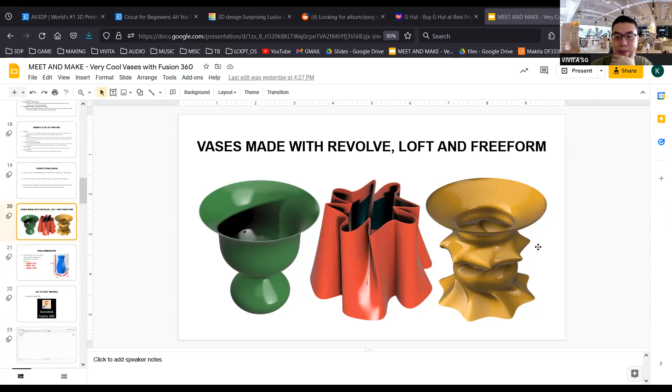So these are the 3 vases that we're making. I actually made this up quite quickly within a few minutes. Today we'll try to make a vase around this size. If we're going to 3D print, we shouldn't make it too big, otherwise it's going to take a long time to print.

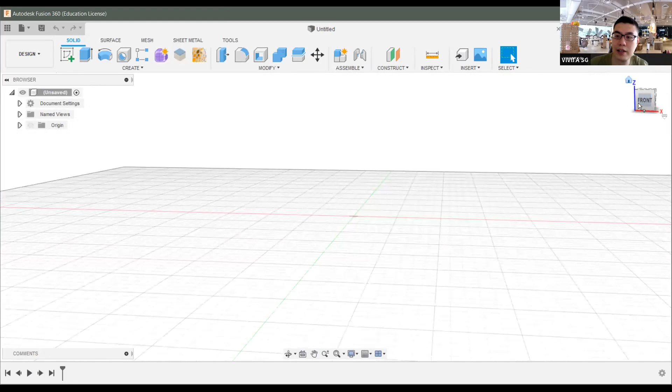The first thing to do when sketching is to always go to the front view. So I'll click on this front button over here. To go to the front view, just highlight this cube and press front. So you should be in this front view. Then the next thing I'll do is create a sketch.

On the top left, there's this sketch button, the one with a blue and green cross. When I click on create sketch, you see this yellow square appears - this is for me to know where I'm placing my sketch. Since I'm in the front view, I'll just click on the square, and I'll be sketching on the front view like this.

Once I'm in this view, I'm ready to start doing my sketch. If you guys are ready at this stage, let me know. If not, I'll give you some time, or if you want me to repeat the steps, I can do so. Remember, go to the front view - click on home, go to the front view.

Front view: click on this create sketch button, then click on the middle yellow square. Okay, then you should be in this view already.

Once you're done, I'll actually create a line. The important thing about using the revolve function is you have to make the shape on one side, either the right side or the left side. If you see there's a green line in the middle, that's the middle point of your sketch.

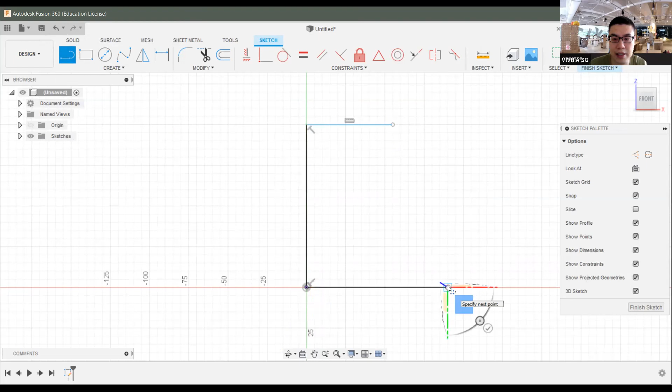So if you're done with that, the next thing I'm going to do is create the outer part of the sketch, which is using the curve.

What I'll do is select this thing called a fit point spline. When I click on this, I'm continuing my sketch, so I'll actually link the top part to the bottom part. The cool thing about this fit point spline is that I can create as many points as I want, depending on what shape I want to create.

I'll click on this point over here because I want to link the top part of the sketch to the bottom part. So I'll highlight this point and click here, then click any number of points that I want. I'm just randomly clicking, and then the last point, I'll link it to the bottom over here.

Once I'm done with that, I move my cursor and highlight this small green tick over here, and I click on it. So this means my sketch is already drawn.

As you can see, I've created a few different points here, so you don't actually need to follow this shape that I'm drawing. You can go ahead and create any number of points that you want. If you want to create only 3 points like this, it's also fine. If you want to undo, you can just click on this button over here to undo.

If I want to draw a simple sketch, I can just draw 3 points like that. I just click close.

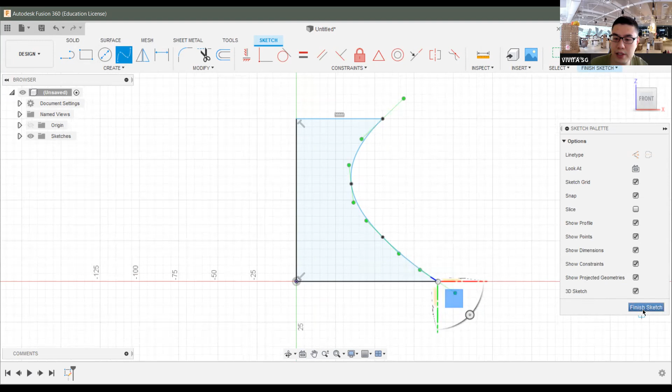Once I'm done with this, I'll click on this button on the right hand side here that says finish sketch. If you see there's this button here called finish sketch, once I click on it, my sketch is done.

Kenneth, yeah, I have a question. So what if I want to make the height of this vase like 100 mm, which is 10 cm?

Okay, 100 mm, right? Give me a minute now. There's this thing here called sketch dimension, let me find that. I think is it under inspect? No, wait, I don't know. No, okay this one I'm not really sure, I need to go and find out more.

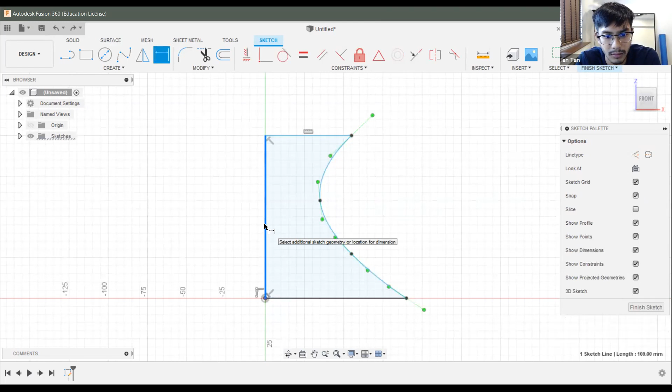When you draw the line, you can select L to draw the line, and then when you just draw one line, there'll be numbers that come out, so then you can just type in your number. So if you want to change the height, I think you can do that, as in you just measure when you draw the line. Or if I'm not wrong, when you select the line, you can change the dimensions, you can type in the dimensions. I think the shortcut is D, so you click on the line, then press D. D for dimension, I'm not really sure if it works.

Yeah, as in the dimension comes up. Yeah, correct, this 55. Then you can change it at any time, like to 60 or 70. That's the nice thing about Fusion.

Okay, so what we'll do now is actually play around with the outer shape of this. So once you draw a curve, you can actually do this.

Once I'm done with this, the next thing I'll do is click finish sketch, then go to create, and select the revolve function. Then I'll select profile, and select the axis. And my vase is more or less 90% done.

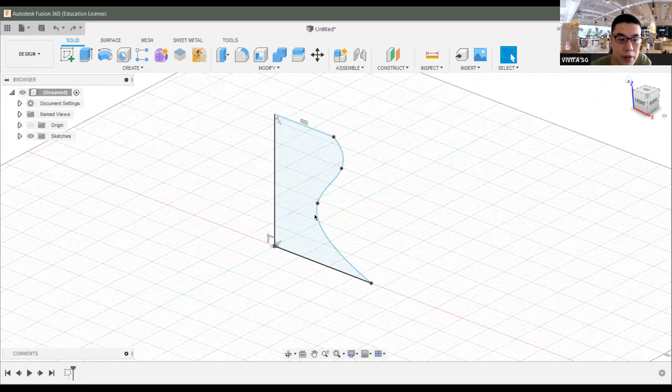The cool thing about Fusion is you're able to edit your sketch even after you're done. So we can right click on this and edit sketch, then click finish sketch, and the shape updates accordingly. You can just always right click on it and edit, so every time you do this you have a different design.

Click finish sketch, done. If you guys need to know how to do the revolve function, I can show you guys again. Once you already have this sketch, you click on finish sketch, then go to this function here called create. Go to create, create revolve.

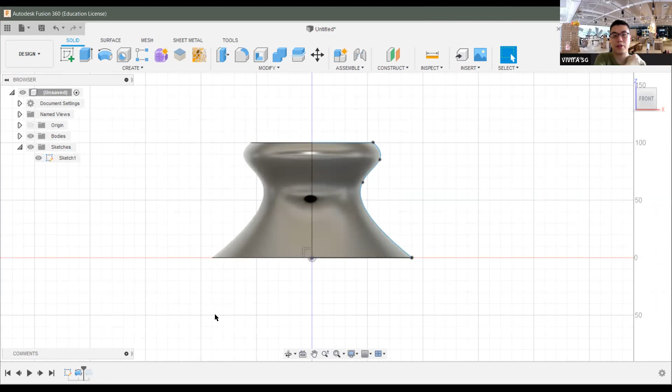And click OK. If you guys have any questions, just raise your hand or unmute yourself and ask.

And then the cool thing is that you can actually edit the sketch like that, and then you update in real time.

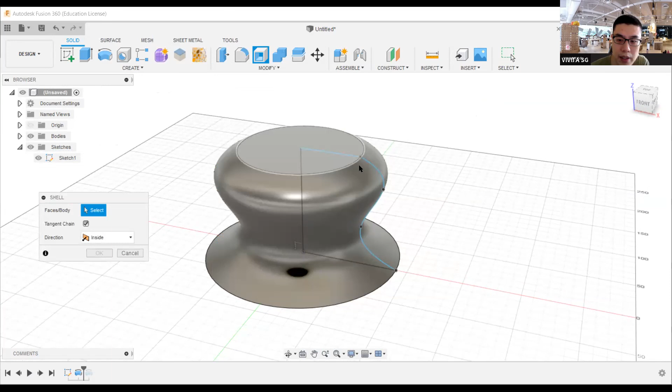Okay, so what I'll do now is, once I'm happy with this shape that I have for my vase, the next thing I'll probably do is add a shell to it so that it becomes hollow. So I'll click on modify and select the shell function, and give it a 0.5 mm thickness. So this is how my vase looks like, and my simple vase is complete.

All this is actually done within less than 15 minutes. And the cool thing is you can keep editing your sketch again and get another design, another vase. Or if you want, you can make it like this, click finish sketch, and you have another vase.

And if you want the vase to be thicker, you can always right click on this, click edit feature, and maybe give it a 1 mm thickness or a 4 mm thickness if you want. Kenneth, is there a recommended thickness? 0.5 is the best, if you're going to 3D print.

Of course, if you make it thicker, then it becomes sturdier, but then it means your printing time will be longer because you have to print the thickness. So this is how we actually use Sketch and Revolve to create our simple vase.

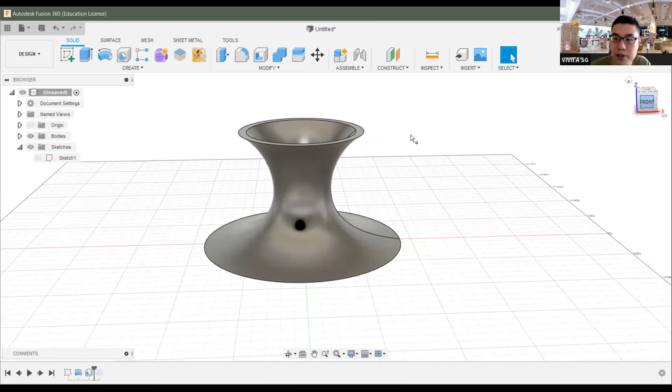The important rule to remember when creating a vase using this function is to make sure the top and the bottom of the vase is perfectly parallel to the plane, meaning they need to be perfectly straight. If not, the revolve function won't work very well. So these three lines need to be perfectly straight. And for the side profile, you can create any number of curves if you want.

So if you guys are done, maybe you can move on to the next function, or if not, you guys can play around with this function again. So maybe what I'll do is create a more complex shape.

Sketch again. And then maybe make something that's more interesting, so I'll have more lines. And then I go to Revolve. So now I have a very weird looking shape like this.

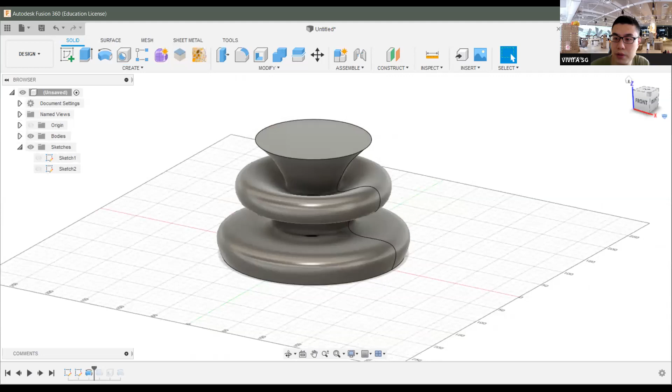And then as usual, the coolest thing you can do is edit the sketch and just play around with the shape.

But Kenneth, for 3D printing, if there's a lot of overhanging, it's quite hard to print, right? So when creating this profile, do you have any recommendations? Try not to have overextended like that. But if you're printing in vase mode, usually overhang is fine, because there's a minimal thickness.

So if it kind of goes like very, very wavy? Yeah, it's fine, it's fine, because you're printing with a thickness.

So usually when you're printing vases, you actually print at a slower speed. You don't usually print at 100%. When I print vases, I print at 70-80% speed. So when I physically tune on the printer, I put the speed to 80%.

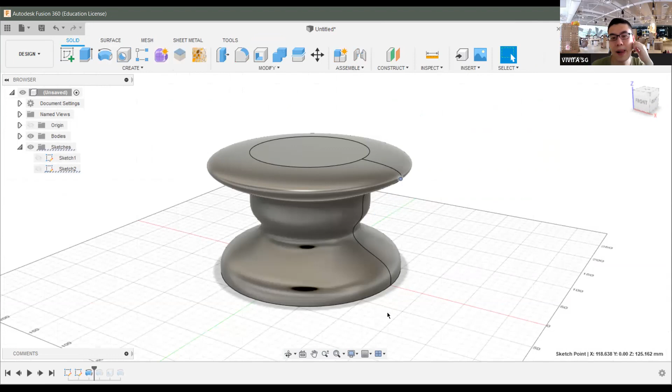So that it won't have any errors. If you want to make the thing like that, it's also fine, but it basically still has to go sideways, right? Yeah, it cannot go up and down. Correct. Nico and Ayana, have you tried 3D printing before?

Yeah, you should try. Then maybe you can share with them a bit about how 3D printing works and what are the constraints when it comes to 3D printing. Okay, the constraints of 3D printing are actually quite a lot. It really depends on what you're trying to make and what you're trying to print.

Usually when we print, we try to print without support, because support actually increases your print time and wastes material. So to minimize that kind of problem, what we do is try to either create something that has minimal overhangs, or we print them as separate parts and join them together, so that we minimize the chances of the print failing, especially when you're printing something very big.

Like for this instance, if I want to print this vase, what I'll do is try to print at a slower speed.

The cool thing about Fusion 360 is there's this thing called section analysis. When I click on it, I can actually simulate how the thing will look like when it's printed, like that.

So this actually will let me know whether or not my model is fully hollow. It's not showing the section analysis. I think maybe it's lagging. You stop dragging it, let it settle. Okay, wait, let me try. Can you see now? I think maybe you drag and stop. Okay, now I can see. When you stop, then you can see, like that.

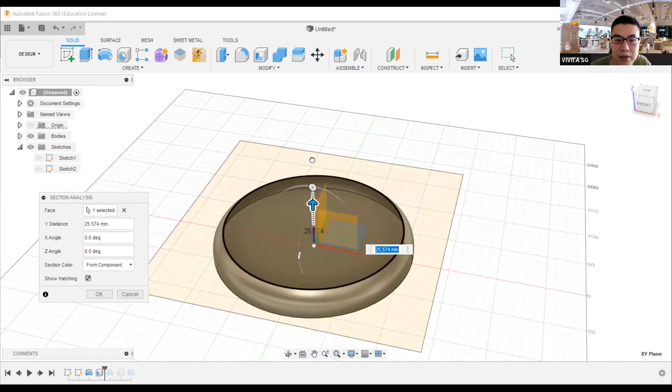Nico and Yana, do you know what overhang is? It's a bit hard to explain without a physical example.

Yeah, can you all see this? And then this is basically a very simple kind of bucket thing. I was trying to create something that can fit together.

But anyway, so the thing is, how 3D printing works is it will build up. It will print the first layer, then the second layer, then the third layer, then the fourth layer, etc. Then it will slowly go up.

Let's say at the third layer, you suddenly have something that's hanging over here. Then your design comes out like here. This is called overhanging, meaning there's nothing below this thing to support it. Then it will kind of fall to the ground, to the bed, so it cannot print properly.

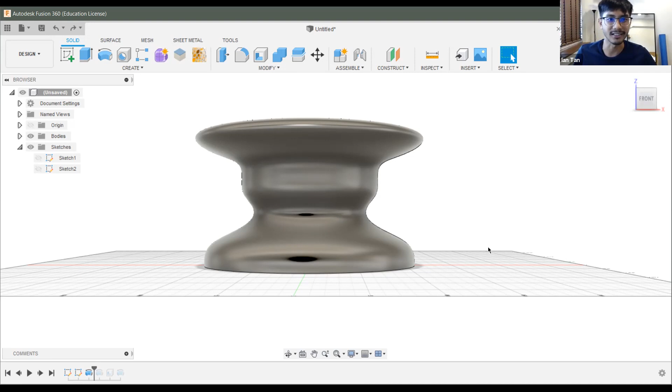This is not even what you all learn in school. We don't use Fusion though. Can you all see? Oh yeah, can.

Maybe I'll change it because it looks a bit fat and big right now, but yeah, I did something like this. Maybe I'll change it later. Then my profile is like this.

It would be cool if we can actually get a ceramic 3D printer in the space, and then we can print all these.

Okay, so mine is a very simple flower vase. So how it looks like is because I use dark mode, so I just want to show from here.

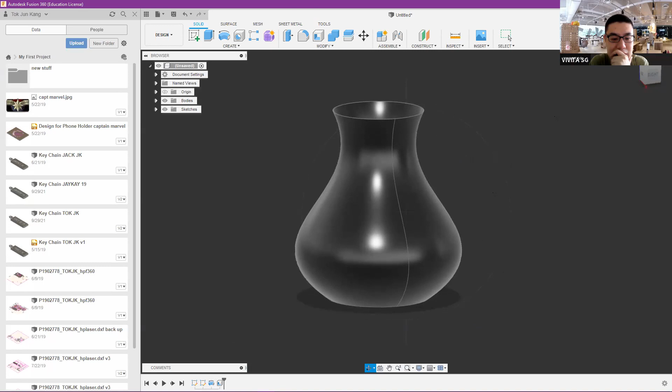Well, you guys got the education license. Yeah, SP provides it, very good. Why can't I press? Oh, need to press edit. No, right click, you right click and edit sketch. But it doesn't allow me to do it.

Steady, you guys can conduct the next workshop, we can multiply ourselves. Yeah, so here's how it draws, just like that.

So there's this, the three lines, right? So it's like the first point, second point, third point, then after that there's a spline. Yeah, it's just like that, really just like that one. Basically just like that.

The cool thing is if we can use the emboss function later to give it a nice surface, it can actually be very cool. But the emboss, that one we will try later.

Okay, Ayana, Raniku, do you want to show or are you guys still working on it? Do you all have your models? No? Okay, do you wait. So far, do you all have any questions? If you want me to repeat the whole process again, it's fine, okay, I always start from scratch and do again. We have a lot of time.

Or you guys need time to figure it out on your own. If you have questions, you can either unmute the phone or laptop you're using, or type it in the chat. Okay, there's a chat function also. Don't be shy, okay, there's only the two of you and all of us are BB Stop staff. You can ask us anything, or if you have any questions as to how you want to make a different shape, you can just ask us, okay?

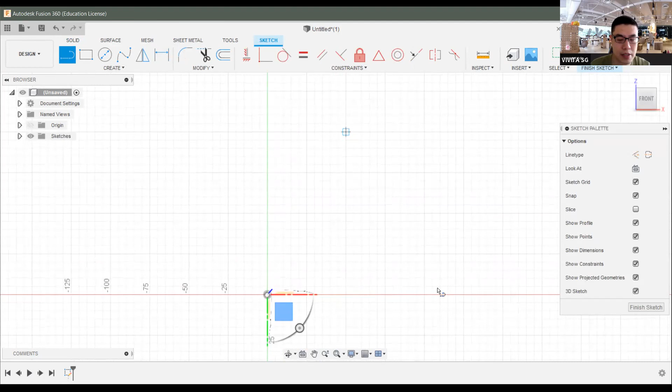Okay, don't worry, I will repeat the steps again from scratch. First thing we do, go to the front view again. Okay, click on create sketch, click on the yellow square, draw 3 straight lines. 1, 2, 3. Okay, and then press the escape button, and then click on the fit point spline so that we can actually draw nice curves.

And then click on finish sketch, then go to create, select the revolve function, select the profile, select the axis, and voila, done. Okay, or you can also...

Revolve it around a different axis if you want, and it becomes like that. Okay, and then create, revolve, click on the center line, and then okay.

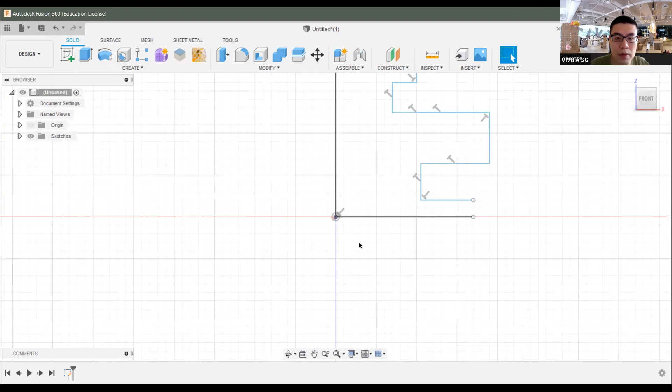Okay, maybe let me try to sketch the side profile with straight lines and see how it looks like. This, yeah, also can, just looks very blocky.

And let's put a shell. Is she not trying to log in from a different device or something? Like, as in, I'm just thinking if she's using a phone, then the screen is quite small, I don't know whether she can see. Yeah, if she's using a phone, then it'll be a bit small to see. Oh yeah, I just realized she's watching this on the phone, I don't know whether it's a phone or tablet or something. Ayana, are you still there? Maybe you want to let us know whether you're changing devices or something?

Yeah, I'm trying to change it on my laptop. Okay, no worries, we'll wait for you, no rush, no rush. Or Divita can use it on Araniko's laptop since he is distracted. Yeah, no rush. Vivita Orchard doesn't have deadlines. Deadlines don't apply to kids, only applies to us.

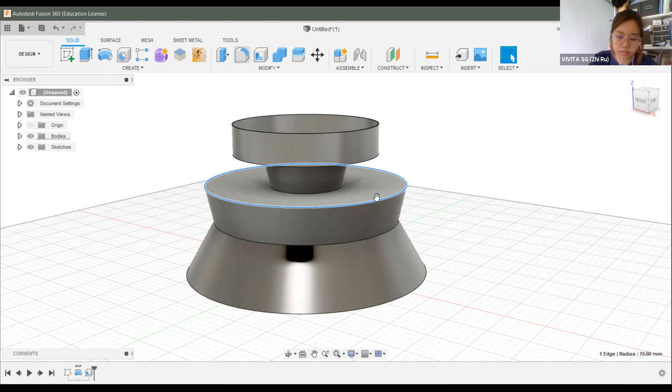Oh no, let me sketch a nice one.

Yeah, but for this I really have to sign in through my school account, I cannot use other accounts. Oh, I think it's the same for probably all Autodesk softwares. Okay lah, we got the free license from Autodesk in the space, but we only have a few, right? I asked for four licenses for Fusion 360, and then I got other software also like AutoCAD, Inventor, all those things. Yeah, I think in the space, I'm not sure why sometimes Fusion gets signed up, it's because the kids use the same account. Yeah, a bit strange, that's the only problem with Autodesk accounts for Fusion 360. Other than that, the other softwares don't actually need the login as well, and it's because of the cloud thing. And Ayana, you managed to connect?

Yeah, okay great, great. Okay, another cool thing I want to show you guys, once you actually revolve it, and then once you shell it, when you're shelling, remember to only select the top face, okay?

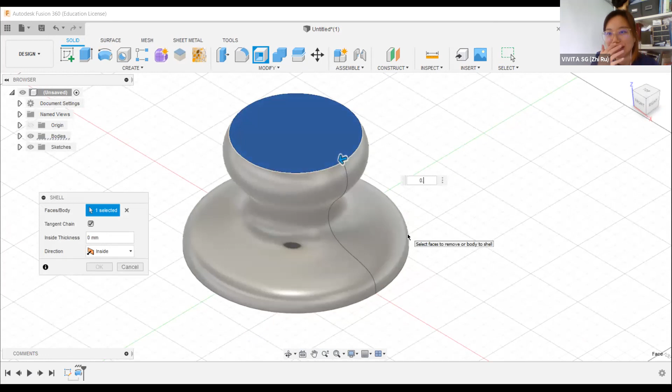Wait, sorry, I think maybe you can show Ayana again, the drawing of the lines and the revolving, because I think she may have missed that part just now.

Okay Ayana, let's start from scratch, let's go all the way back. Remember, click on the front view, click on the create sketch button over here, click on the yellow square, and then select the line over here. When you select the line, you see your cursor becomes this light blue square, and then just draw 3 straight lines. I'm just going to draw roughly 3 straight lines and make sure the middle line is actually along the green line that you see over here.

Like this, and then once I'm done, I press the escape button. I'll just start with these 3 straight lines first, then once I'm done with this, I'll start to create the nice curved profile on the side. Ayana, if you've gotten to this stage, just let me know, or I can repeat the steps again: click on line, draw one line on the top, the middle line, and the bottom line, and then press the escape button once I've done my 3 lines.

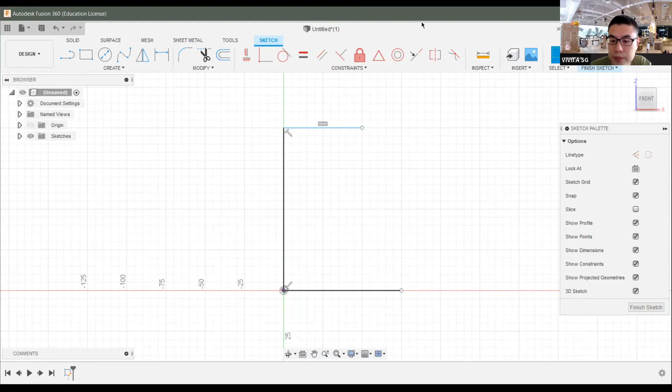Ayana, are you there? Have you got it? Any questions, just unmute yourself or type in the chat. If you're okay, just give a thumbs up, then I can show you the next step. Ayana, are you there? Ayana, it's fine, you can remain unmuted. Yeah.

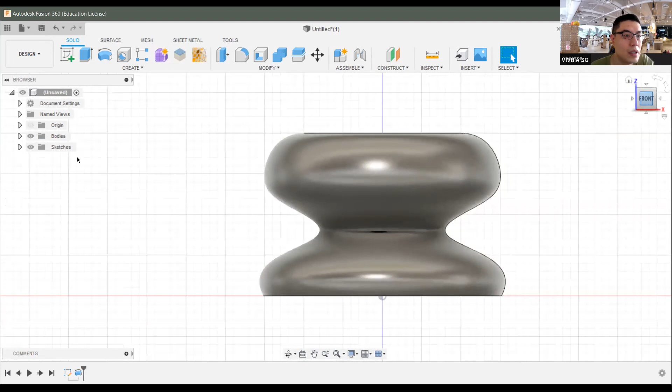When I'm doing the first 3 lines, do they have to be the same height? No, they don't need to be. We see the sketch I drew, right? The top line is actually shorter than the bottom line, but it's really up to you. You can have all lines the same, or the top line longer than the bottom line. This is fine as well.

You don't have to worry about whether the top or bottom lines are long or short, because once we sketch the other side profile, you can actually change the lengths of the top and the bottom. That's the good thing about Fusion 360 - nothing you draw is actually final until you decide it to be final. You can always keep changing your sketch and design whenever you feel like it.

Suppose I already started drawing this sketch like this. I can actually make the top shorter - if you can see on my screen, I'm making the top shorter. Initially I drew it as a long line, but now I decided to change it. I can make it shorter, and also make the bottom one longer if I want to. It really doesn't matter if it's long or short. If you want to make both the same length, that's also fine. So don't be too worried about the lengths, because you can always change them if you feel like it.

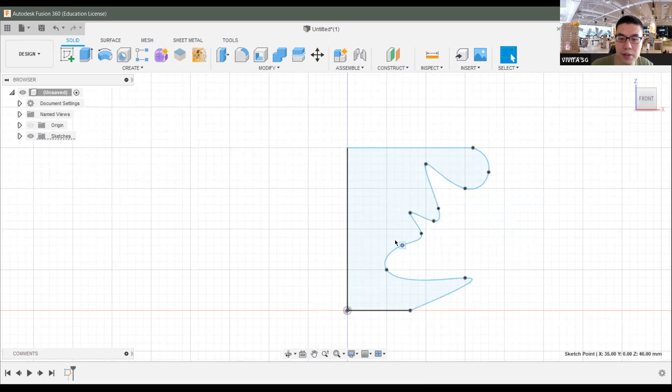The cool thing is you can actually move these points around to form the shape that you want, so you can have weird shapes like this. And then you revolve it to get something unique like that. Because the more points you have, the more control you can have over it.

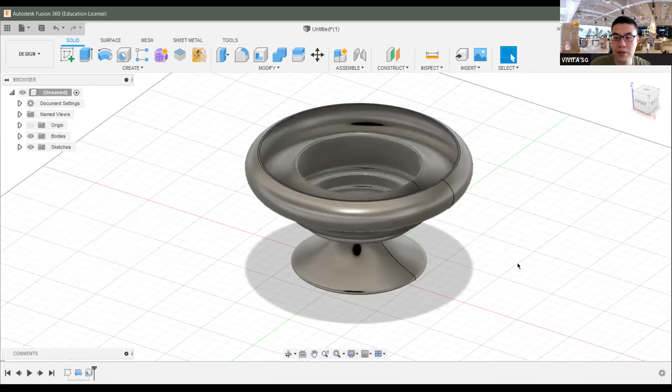And then you see this dialog box that appears. You just need to give it a number. For 3D printing, what we usually do is give it a thickness of 0.5mm, so just type 0.5 and tap enter. Now you can see your vase is more or less done - it's hollow all the way through.

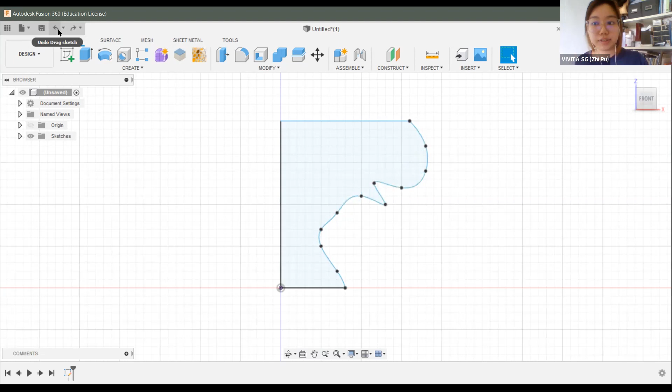Can you repeat that? I couldn't really hear anything. Okay, what were you saying? Which part would you like Kenneth to repeat? No, can you just repeat what you said because I couldn't really hear anything. Which part are you at? Are you able to get a curve? Yeah. Okay, maybe you're at the revolve, the part where you need to do the revolve, right? So you have drawn the 3 lines and you've already drawn the curve already, right?

Yeah. Okay, so the next thing that we need to do is to revolve it. So revolve is actually located here. If you see this create button on the top left, you click on it and then select this function called revolve. Or if you have the same UI as me, you can click on this button over here called revolve. So when you click on it,

you will see that the revolve dialog actually appears. So when this appears, what you need to do is to select the profile. So when I click on select profile, I'll highlight my mouse and select this entire blue thing that you're seeing. So I've selected my profile already.

Okay, if you're able to get to this step, just let me know. I'll repeat again. Click on revolve, click on profile, and then select this profile. How do you know if your profile is selected? You can see that it's actually showing here - one selected.

Okay, so once you have selected this, the next thing you need to do is to select the axis. The axis is actually the middle line. So when I click on axis, I'm selecting the middle line over here. If you can see, when I zoom in and move my mouse over, it's actually highlighting it. So when I highlight it, my vase is revolved around the center axis.

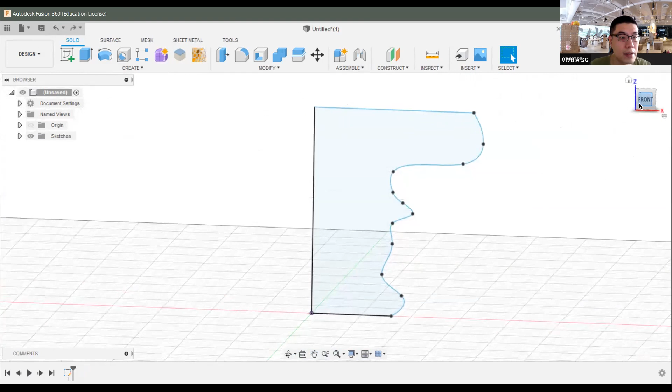Let me just show you guys the steps again. Click on revolve. Click on profile over here. Select the profile, so when you move the mouse over, this entire thing is selected. Then select the axis, and select the middle line over here. And then click on OK, and you're done.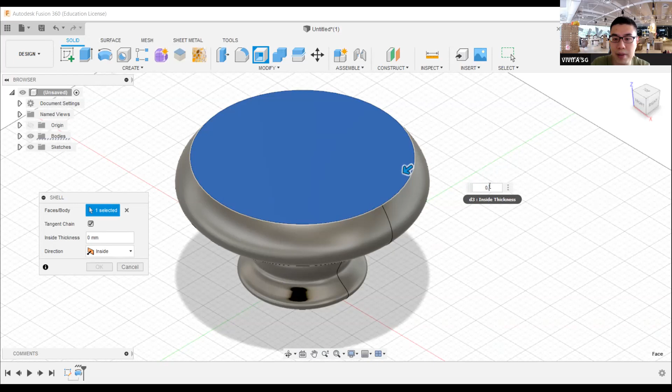And when it turns blue, you see there's this small text box that appears. That's actually for me to decide my thickness. So as I mentioned before, the best thickness size to use is actually 0.5 mm. So let's type 0.5 and press enter.

You can always change it if you're not happy with it. So if I want it to be thicker, I can give it 3 mm. Or if I want it to be even thicker, I can give it 7 mm, or 70 as well. Oh sorry, maybe - so as you can see, my vase now is quite big.

Okay, so once I'm done with this, my vase is more or less done already. If you're able to get to this step, just let us know.

Let me repeat again. Click on the home button and go to the perspective view so you can select the top part of the vase. Click on the shell function, then click the top face. Highlight and select the top face, enter 0.5mm in the dialog box, and press enter. Now you have your vase, and it's perfectly hollow.

The next step is to export this so we can print it. That part is quite straightforward, I can show you guys how to do it. If you look at the left-hand side, there's this thing called bodies. Click on this button and select the body. When you select the body, the whole thing is selected. Then right-click on it, there's a function called Save as Mesh. So when you click Save as Mesh, you can save it as an STL file.

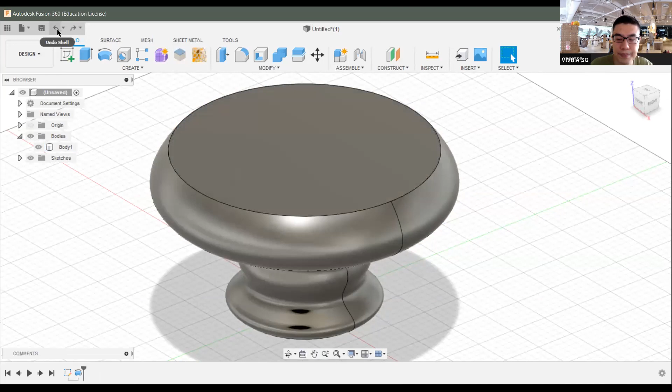Okay Ayana, do you need me to repeat any of the steps? Or are you lost, are you stuck anywhere?

I can't find the revolving button. Okay, you can't find the revolve function. Let me share screen. The revolve function is located on the create bar. Do you have a create bar over here? Click on it and look for the function called revolve. Do you see it there? There isn't any on there. How can that be?

Are you on solid? Or are you on the surface tab or mesh? Make sure you're on the solid tab. Can you see where my mouse is? Do you see that I'm on the solid tab, or are you on the surface or mesh? Maybe you're on a different tab, that's why you can't find it. Yeah, I changed it to the solid one. Okay, then do you have this create button over here? Yeah. Then click on it, and you should be able to see the revolve function there.

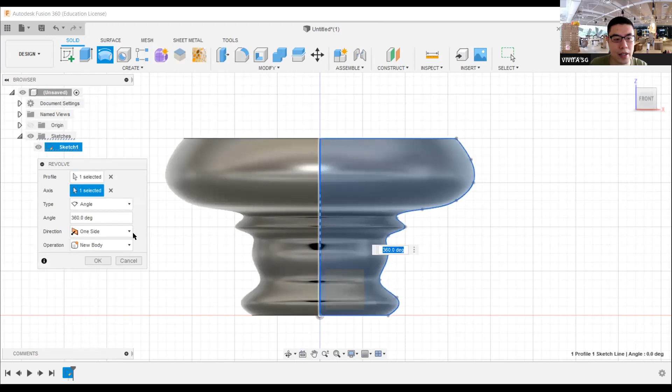Okay, so how do you revolve it? You select the sketch again. Go to sketch. On create, revolve, select the profile. Make sure it shows one selected. Click on the axis, which is the middle line of the vase. And then you should have this. Just click OK.

Once you manage to get this, the last step is to shell it. Shell is still on the solid tab. Look for this thing called modify, then select this button called shell, select the top face of the vase, give it a thickness of 0.5, and press enter. You should be able to get something like that.

Hey Ayana, everything okay? Do I hollow it after I revolve it? Yes, revolve it first and then hollow it, because if you're not revolving it, there's nothing to hollow out.

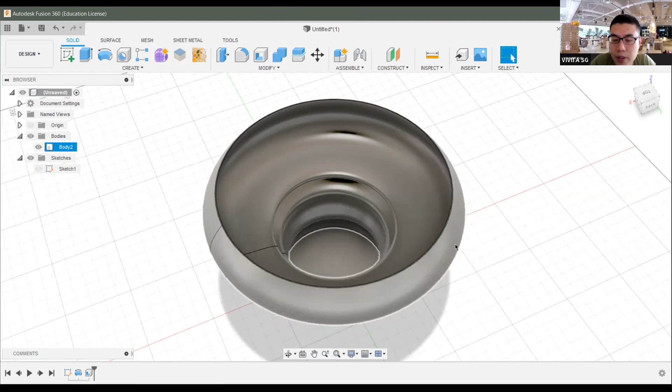Ayana, have you done the revolve step? Yeah. Great, great, okay, last step is just to shell it. What do I do once I've shelled it? Once you shell it, you're done already. You're done, man. Good job, your vase is done.

You can save it for print. Ayana, are you able to show us your vase? If you can share screen. Yeah, do you want to share screen?

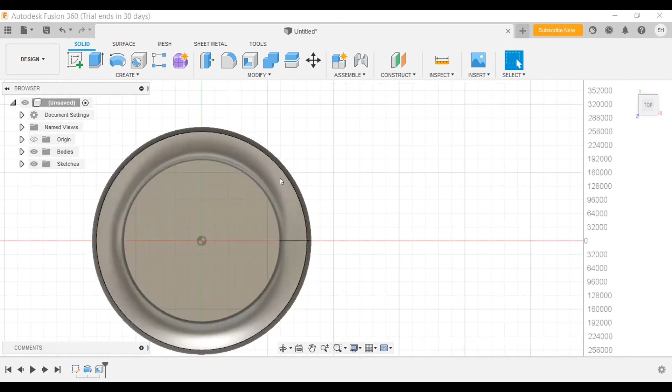Nice. Ayana, maybe you can change the view. Click on the home button on the top right, do you see a small home icon there? Oh, that's nice, wow, good job Ayana, very nice. You see the cube at the top left corner, there's a home, go back to the cube on the right, on your top right. The view, the one that says slightly lower, no too low already, the one that says front. You see the ZX front, you see the home button, the small home icon? Click on that one. Nice, looks very good.

Okay, remember to save your work, Ayana. Let me show you guys how to save.

Okay, I don't actually recommend saving. What I do is usually I export, because saving actually saves it to the cloud account, which takes a long time to load sometimes. So if you look at the screen, there's this button called save. Usually I don't use the save function. I use this function here called export.

When I click on export, I can save this Fusion 360 file as an F3D file to my local drive. So whenever I want to access this file, I don't have to log in to the cloud every time and wait for it to download. It's actually faster that way.

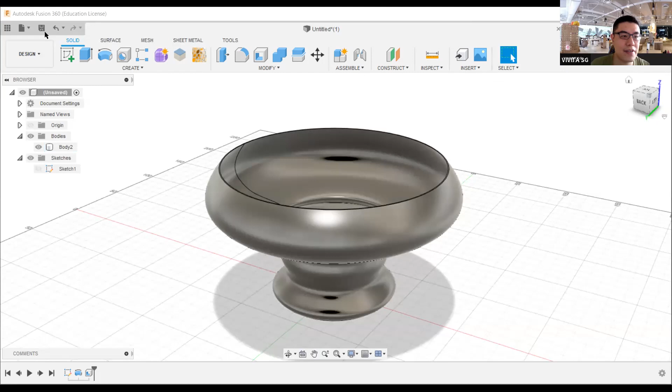So what I'll do is type a name, call it test vase, and then click on export. Right now my file is saved on my desktop already, over here, test vase. Now if I click on save, I can show you guys what happens. It actually uploads to the cloud, which sometimes takes a long time to load, and sometimes the cloud servers are on maintenance.

I can't actually access my file if they're doing maintenance. So I usually try not to save to the cloud if I don't need to.

These are some of the files which I saved to the cloud last time. If I want to access my file again, I can click on it and double click to look for it. So if I export my file as an F3D file, when I come back to Fusion 360, I can always open up the file from my computer, open it from my drive, and open it up again.

That way I don't have to always wait for it to download from the cloud. Ayana, if you want to save it to the cloud, it's also fine. The files won't get deleted, don't worry. It's just that sometimes when they're doing maintenance, you can't actually access your file if you want to work on it. So exporting is more of a safer bet for me, because I've experienced that before - when I save to the cloud it happens to be on maintenance and I can't work on it for about 2 or 3 days, which delays everything.

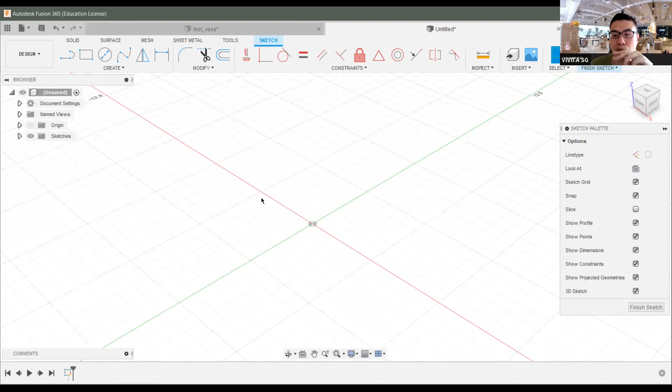Okay, so for this loft vase that I'm doing, I'll create a very simple one. I will have the base of my vase as a circular shape and the top part of my vase as a square shape. So what I'll need to do is sketch two shapes. Right now I'll just create a circle.

Okay, so when I'm done with this, I click on Finish Sketch. So I've created the bottom part of my vase. Let's try to create that first. Okay, so this is actually the bottom of my vase.

The next thing I need to do is create another sketch for the top part of my vase. In order for loft to actually work, you need to draw two different shapes. You can't draw similar shapes for the bottom and top of the vase, otherwise that will just be a very straight vase.

So what I'll do now is create another shape for the top part of my vase. To do that, I need to create something called an offset plane, meaning I'll be sketching another shape directly above this sketch I've just drawn. I'll need to use this function called offset plane.

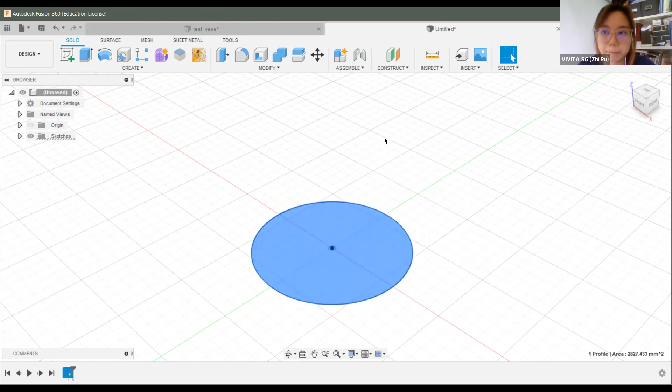Not yet, not yet. Okay, are you able to find where the circle is? Make sure you are in solid as well. Make sure you're in sketch, okay?

Okay, click on create sketch and then select this square over here, the one on the extreme right. Click on it and you should be drawing on this plane already. Yeah, so this plane has a green and red line. Are you on that plane?

No. Okay, you go to create sketch. Okay, do you see a lot of grids there? When you click on create sketch, Ayana, do you see these 3 yellow squares that appear? You see the one with the green and red line, the flat one. The current one on screen is blue and red. The one we want to choose is green and red, which is the one on the right over here.

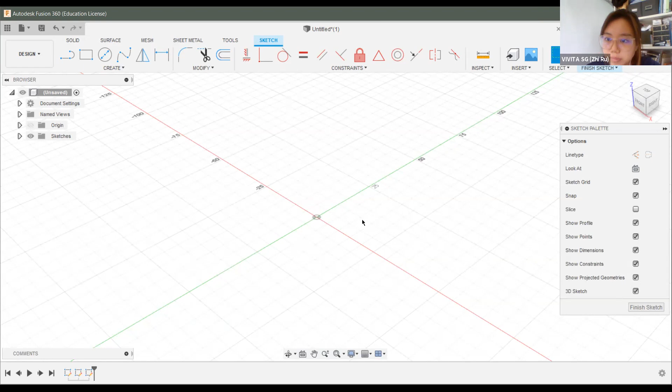Can you find create sketch? Okay, so are you able to select the bottom plane? I think I clicked on the wrong one. Oh okay, if you click on the wrong one, just click on undo — there's this undo create sketch over here, just click on it again. Okay, so just go to create sketch. Select bottom. Okay.

Ayana, are you able to get to this stage?

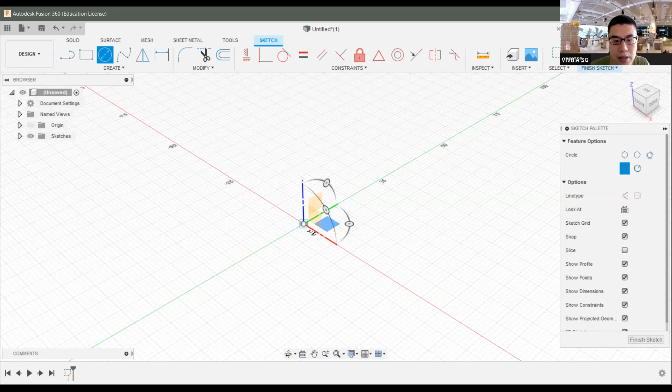Okay, so the next thing we'll do is create a circle. Just click on this create button and highlight the circle. You see there are quite a few options when you move your cursor on the circle, but we'll actually create a center diameter circle. Can you see that I'm selecting this center diameter circle? Okay, click on it, and make sure you move your cursor to the exact center dot of this entire thing. Once I move my cursor there, I'll click once and drag it out. So you have to decide how big you want this bottom base to be.

If I want it to be 40mm, like about 4cm, I just enter 40. If I want it to be 80, I'll type 80. If I want it to be 60, I'll type 60. But for me, I want it to be 40, so I type 40 and press enter. Then my circle is drawn already. Don't worry about the size, you can always change it later once we move ahead. As I mentioned before, in Fusion 360 you can always edit all the dimensions if you're not happy with it, even though you've made a lot of progress with your model.

So once I've done this sketch, the bottom part of my vase is done already. Ayana, have you drawn your circle already?

Yes, okay. The next thing we need to do is click on this button here called Finish Sketch. So just click Finish Sketch, and then your circle is more or less ready.

The next thing we need to do is draw the top part of the vase. Like I mentioned before, the top part of the vase shouldn't be the same shape. If not, your vase is just going to be vertically straight, which is quite boring. So what I'm going to do is sketch another shape, which is the top of my vase. In order to do that, I need to create something called an offset plane. That means I'm taking another piece of paper, drawing it, and putting it on top of this circle.

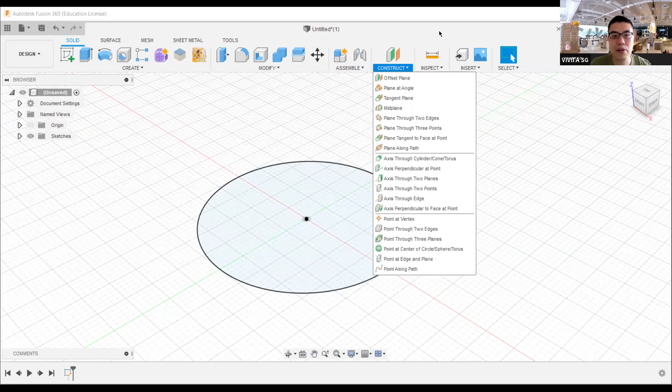So how I'll do that is create an offset plane. If you look at this construct button, when I click on it, there's this thing called an offset plane button. Before I select that, I need to highlight my circle. So I move my mouse over this circle and select it. When I click on it, it should turn dark blue, like this. Then I go to construct and select offset plane. When I click on select offset plane, you see this yellow grid appears, and there's an arrow showing how high it's supposed to be.

If you're able to get to this step, just let me know and I'll show you the next step. I'll repeat again: before you select the offset plane, click on your circle, go to construct, select offset plane, and you should get this yellow grid appear. Ayana, let me know if you're able to get this.

I've got it. Yeah, she got it. She got it, right?

Okay, then the next thing we need to do is decide how high you want your vase to be. That 0.00 mm is for me to decide how tall I want my vase to be. So if I want it to be 80cm, I just type 80cm. If I want it to be 8, I just type 8. The values don't mean anything, you can always change it later.

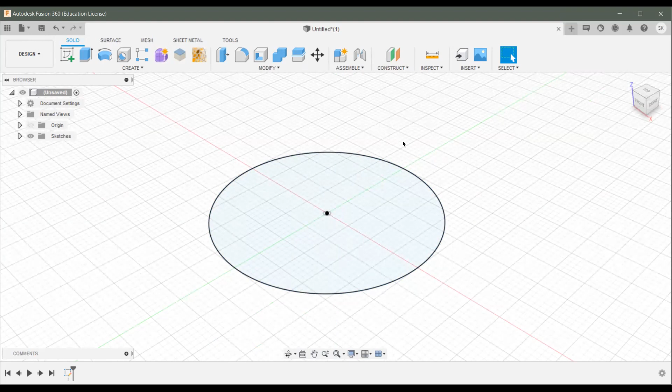So like for mine, I want it to be 6 cm, so I just type 60 and I press enter. Okay, so my vase will be about 6 cm.

So once you have done this, the next step is to actually create a sketch on the higher plane. Okay Ayana, are you done with this? You can always change the height later.

Don't worry about being so precise. Okay, so the next thing we need to do is to actually draw a sketch onto this higher plane. So what we need to do is move your mouse and select this plane on top over here. When you select, click and highlight and select it, it will actually turn dark blue like this.

So when I click on this plane over here, then the next thing I'll do is I need to create sketch. When I click on create sketch right now, I'll go to the top view like this, and I will draw another shape which is not a circle. So what I'll try to do now is actually try to draw a square.

So I actually use a 2-point rectangle to draw a square on the top of it. I'll place it at the center of the grid over here, and I'll draw... click the wrong function. Okay, I'll actually draw a center rectangle. So I'll click on create.

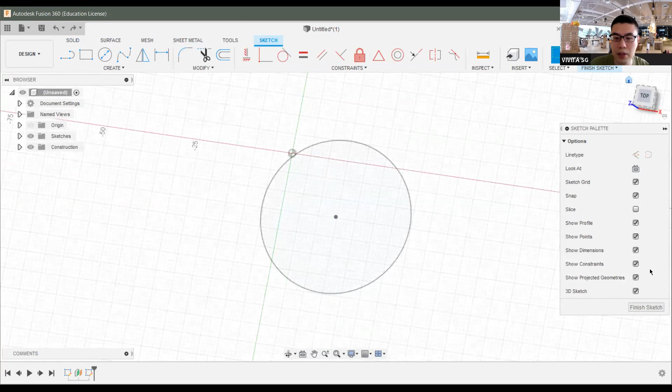Like this. Okay, remember, if you want to draw on the top plane, make sure you select the offset plane. Make sure you select the offset plane that we drew just now. Make sure you click on it and then create sketch.

If you don't click on it and if you click on create sketch, you're actually drawing it on the bottom where the circle is. So when you click on this offset plane, it means you're telling Fusion that you're drawing on this plane and not on the bottom plane. So create sketch and then go to the top view.

Okay, and then what I'll do is I'll create a rectangle, which is a center point rectangle at the exact center. And I'm not actually drawing a rectangle, I'm drawing a square, so it has to be exact on both sides, so it's going to be 20 by 20. And I type enter and I click finish sketch. So as you can see, top part of my sketch, top part of my vase, is a square, and the bottom part is a circle.

Before I create the sketch, do I have to click offset plane? Yes. Okay, if you have your offset plane, right, you should be able to see this yellow thing, right?

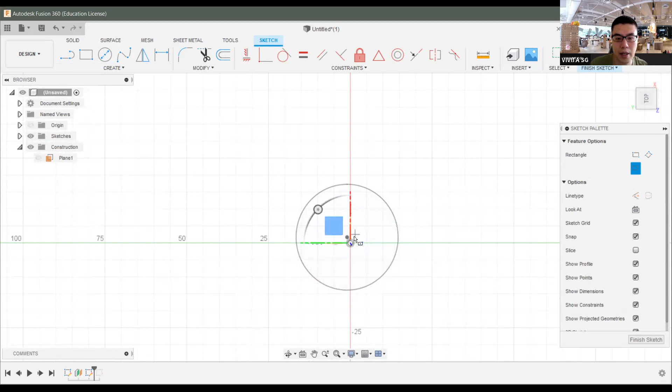And once I'm done with that, I'll go to the top view over here, click on the top button, go to create over here, select rectangle, and click on center rectangle. Move my cursor to the exact center point over here, and draw a 20 by 20 square. Good. Click finish sketch. And then once I'm done, I click on the home button over here, go back to the home view.

Okay, we are about 80% done with this already.

Once we have two sketch objects, one at the top and one at the bottom, the next thing we'll do is create a loft. To do that, go to create and look for the loft function. Remember you have to be on the solid tab. You'll see the revolve function, but move down two functions and you'll see loft. When you click on loft, the loft window should appear.

Then what we'll do is highlight the top and highlight the bottom. Select the top and click once, select the bottom and click once, then click OK. Now you have a very simple shape like that.

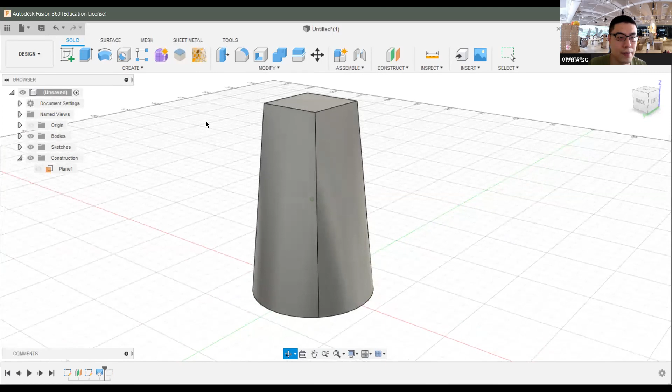You see the top is actually square, the bottom is actually circle. Let me just undo again. If you're able to get to this step, just let me know. So if you've drawn your sketch on the top and the bottom, you should be able to start your loft already.

Okay, Ayana? So once you have done this, go to create, select the loft function. Then once you see this window appear, just click once on the top and click once on the bottom, and you will see that your vase is already done.

If you're able to get to this stage right now, here's where the fun comes in. You see these four white dots over here, and there's actually four white dots at the bottom too - four white dots on the square and four white dots on the bottom. The cool thing about loft is that you can actually make this into a twisted looking vase.

How we'll do that is to select the point and just move it around. As you can see, if I move the control point, the shape of my vase actually changes. You can move this like that, and you can move it like this. You can create a twisted looking vase simply just by rotating and moving the points like that.

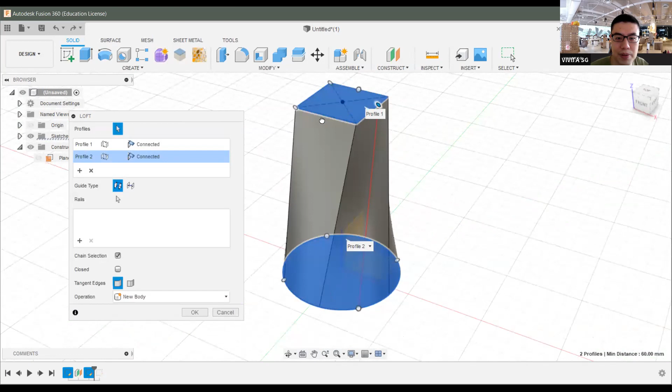The cool thing is also you can move the one at the bottom as well, so you can have a different effect too, like that. You see, I'm actually making it more twisted just by rotating the points like that.

That's how people actually make twisted vases using this simple function. So the more I twist, the more curves I get like that. If I'm happy with this shape, I'll click on OK. So this is how my vase actually looks, right? This is how you can make simple twisted vases using the loft function.

If you're not happy with this shape, what we can do is always edit the loft again. If you look at the bottom left, that's actually your timeline, which is your history. What you can do is right click on this button and click on edit feature. If I click on edit feature right now, I can always change the shape again.

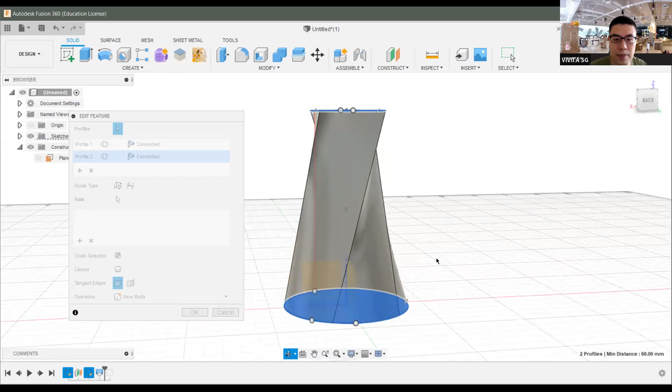And I can move it back to the original position as it was before. I can move it back again, something like that, back to how it was. Everything back again. And now I have a different shape, and I click OK. This is my shape right now. Yeah, Ayana.

Once I'm happy with this shape, I have to use the same function again, which is the shell - same as the revolve vase. What I'll do is select the top face, click on shell, and give it a thickness of 0.5. Now I have my vase, and it's perfectly hollow all the way through. So this is how you make twisted looking vases using the loft function.

Now the cool thing about the loft is you can actually create more than one offset plane, meaning you can have 3 or 4 different layers. So you can have the base as a perfect circle, the middle part of the vase as a square, and the top part as maybe a star or a heart shape. That's the cool thing about loft—the more planes you have, the more complex your vase will be. Let me create a new one just to show you the effect.

For this vase that I'm going to be making, I want my bottom to be a perfect circle. Then I'll create an offset plane. I want my vase to be 80 mm, so I'll give it 40 first.

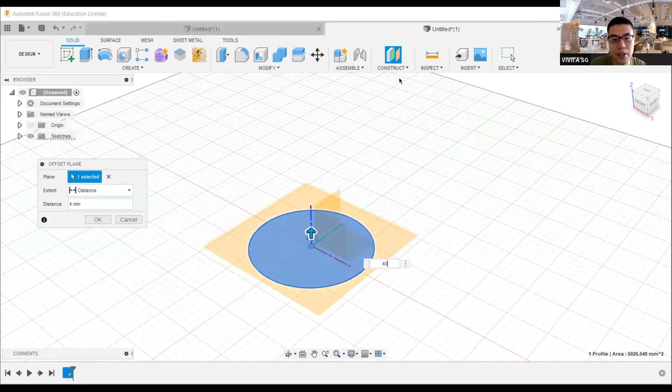On this plane, I'll actually draw a weird shape, maybe using spline. I'll give it a rough, irregular shape like this. New sketch. Then the next thing I'll do is...

Then I create another offset plane from the second one onwards, which is 40. Click on it, and I'll create another sketch on top, which is here. Sketch. Now I have 3 shapes, and I will loft the 3 of them together. So I'll just select 1, 2, and 3.

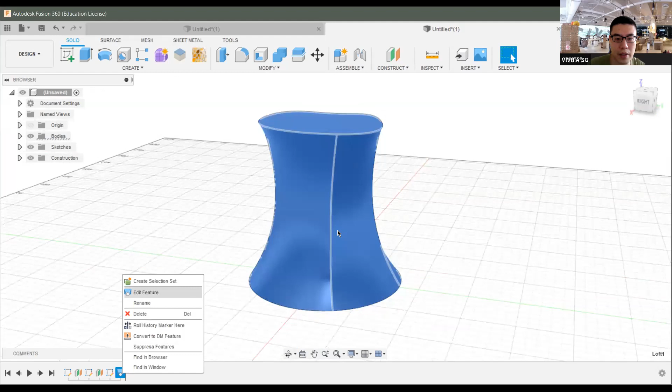Now I've created a loft with 3 shapes. The cool thing is I can also keep editing it, and I can play around with the shape like this. I can move them around. So right now I've created a vase using 3 loft shapes, so I can make it look very complicated. I can twist them around, make this more curvy. It's really up to me, and it's really up to your design.

I'm happy with this. Click on OK, and this is how my new vase looks like. As you can see, if you create a loft using 2 shapes, it looks quite simple, but if you create something with 3 or more shapes, it tends to look more complex. Same thing as well—once I'm happy with this, I click on the top face and shell it. And this is my second loft vase.

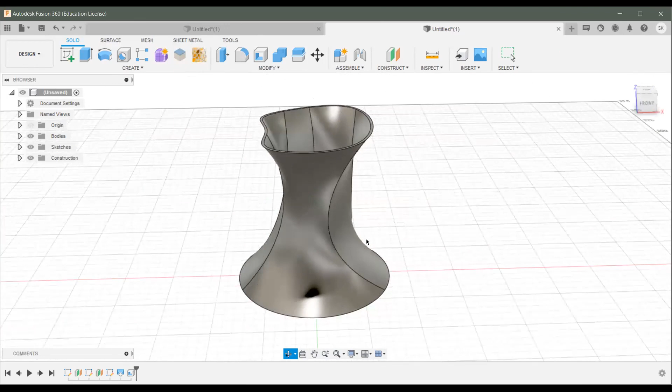So this is how simple it is to create loft vases. Ayana asked, how would I change the height? That's a very good question.

Let me check. The first thing you need to do is actually to measure. If you click on this inspect button, you can click on the thing here called measure, and then you can actually see how high your vase is. Mine is about 60.39 mm.

So if you want to change the height, do you guys know how to change the height? Sketch dimension—I think I know. So you know the step where you offset the plane, you just edit that. Edit sketch? No, the one before—edit feature. Okay, Ayana, what you can do is go to the bottom over here.

Do you see at the bottom here, there's this thing called the offset plane button. Just right click on it and edit feature. So you see your height here is now showing 60. If you want it to be bigger or shorter, you can just change it. So if you want it shorter, I just type 40 and enter. Now my vase is shorter.

If I want it to be higher, I just select the offset plane feature again, edit feature, and if I want to make it taller, 90, click enter, and now it's taller. So just by simply changing these numbers, you can have different sizes, and you can create different designs just using one function.

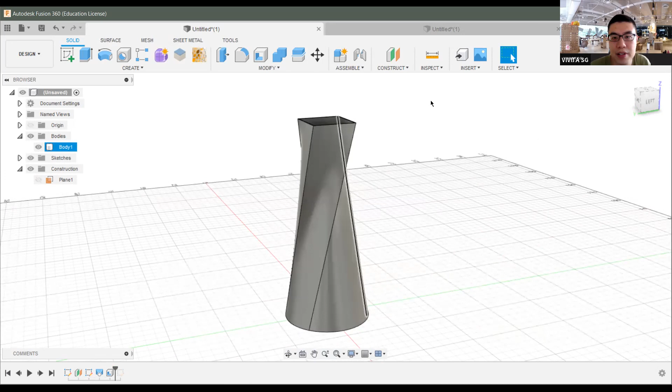I'm quite happy with this. I'm going to save this, maybe print it later.

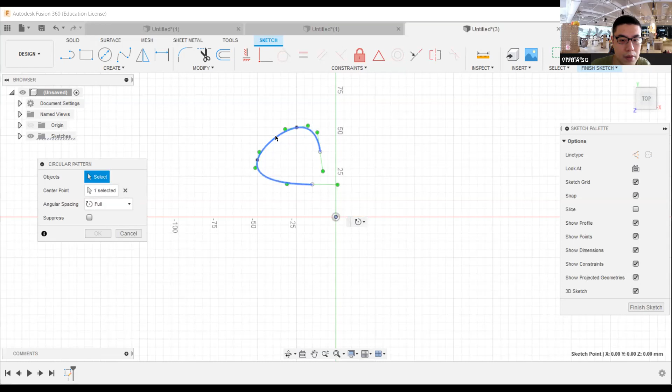So what I'll do is create 5 or 6 patterns like this, and then I can join them up to create a flower kind of pattern from the bottom part of my vase. This is how people make complex looking vases. This is the shape that I want. I can move these points around and you see it already looks like a star shape.

This is a circular function, and this is for you to create more complex shapes. So what I'll do is create a fit point spline. I'll roughly draw a point like that, click, then press escape. Click on these 3 lines, then click on this green tick, move my cursor, and select circular pattern.

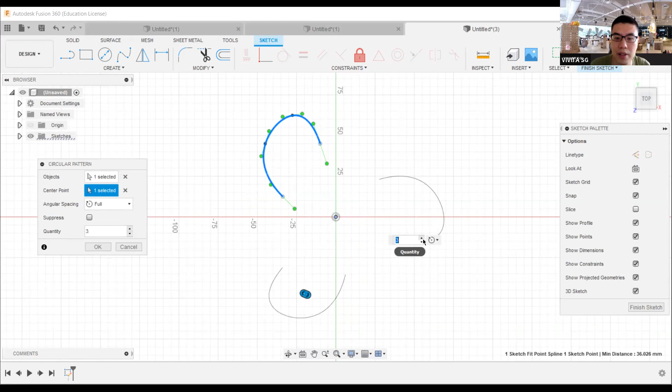Select the object that I want, and for the center point, I create it here. You see this dialog box appears saying 3, showing there are 3 copies of this sketch. I can create any number of sketches I want. The more petals, the more curves, the more sides it has. If I want 5 or 6, I can just type that in.

Let's type enter. The next step is to move the lines together so they're all connected. The cool thing is if you move one line, you can connect it to the other line like that, and move it in and out, and it becomes like a flower petal vase.

Once I'm done with this, I can simply extrude it if I don't want to loft it. I can just do this, and shell it. This is how a simple flower container is done.

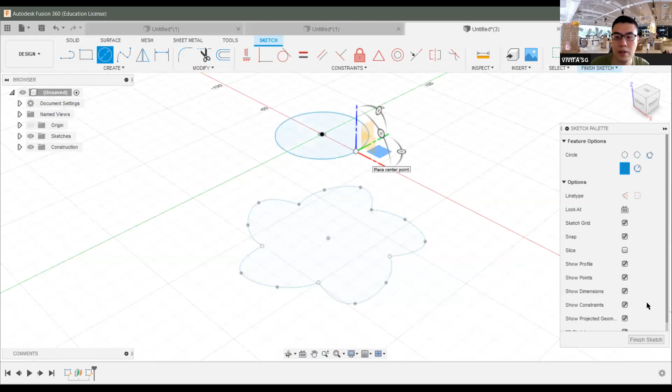This is how you can create complex looking vases. What I'll do next is create an offset plane, and then let me draw a circle, and just loft these two together. So now I have a vase with a flower-like base and a top that's circular.

Ayana, do you have any questions, or are you trying to explore? Diana, do you want to show us what you have done? Okay, let me stop sharing.

Wow, nice, very nice. Good job, Ayana. Ayana, would you like to print that? Or would you prefer to print your previous one, the first one you did, or both? Okay, we can print all of them, and then display it in the space. We need more kids' 3D printed projects — right now it's all Abel's vases. Well, she can bring it home too. We can print more of them, yeah.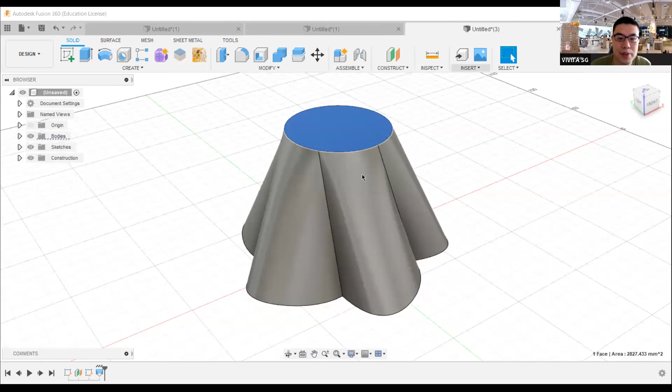For example, if I have this one here, I can save it as one vase and modify the loft and save it as another vase. I'm happy with this, so I can select the body and save as mesh. The format for saving is called STL. I just click OK, and call it vase design 1. So this is vase design 1.

So I want to change this into another one. What I'll do is edit a feature, and then change the shape a little, just by moving the points around, and also maybe changing the height a little.

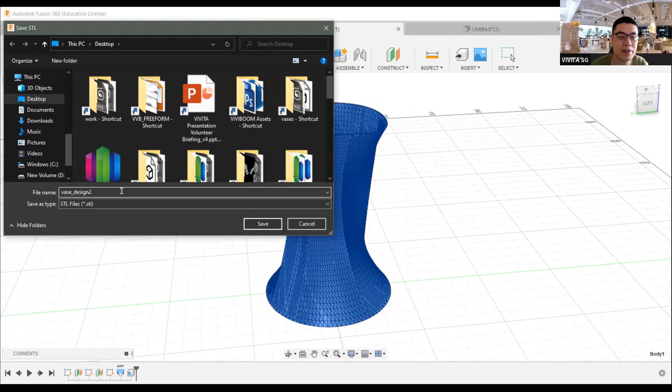And now I have a different design, so I can save this as vase design 2. Now I have vase design 1 and vase design 2. This is how quickly you can change the shape and height of your vase just using one file.

If I undo, that's my previous design. This is how powerful Fusion 360 is. Simply by changing a few functions, you can export multiple designs from a single file. You don't have to create a new file unless you're actually creating a new design. That's the cool thing about Fusion 360.

So Ayana, which one do you think is more fun to use, the loft or the revolve? The loft. Yeah, loft is more cool, right?

I don't know if you need to go, but there's one more function I want to show you, the freeform function, which is personally my favorite. It's really cool to work with because you have a lot of control over the shape of your vase. Right now with loft and revolve, you're constrained by the sketch objects you draw, meaning you can't change the shape of your vase unless you change the shape of your sketch.

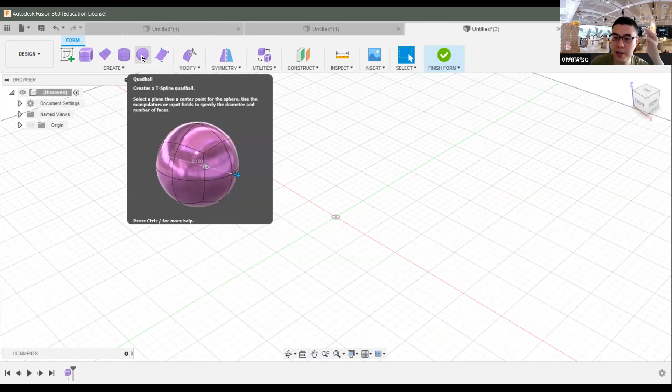The thing about freeform is that you're actually working with a block of clay. I'm sure you've played with clay before, you can squeeze it, press it, push it, and form it into any shape you want. In Fusion 360, you can do that using the freeform mode.

So what I'll do right now is create a very simple shape of a vase. I'll start with a simple sphere, which is a ball, and I want it to be 80 mm. Now I have this block of clay over here.

With this block of clay, I can manipulate the shape of it. If I move my mouse over this sphere, you can see I can select 3 different parts. If I move my mouse over here, I'm selecting the face. If I click, I'm selecting the face. If I move over the line, I'm selecting the line. If I move over here, I'm selecting the point.

The nice thing about freeform is I can click on any part of it and move it around like this. You see, it's exactly like clay. I can squish it like this. I can select this and move it out like that.

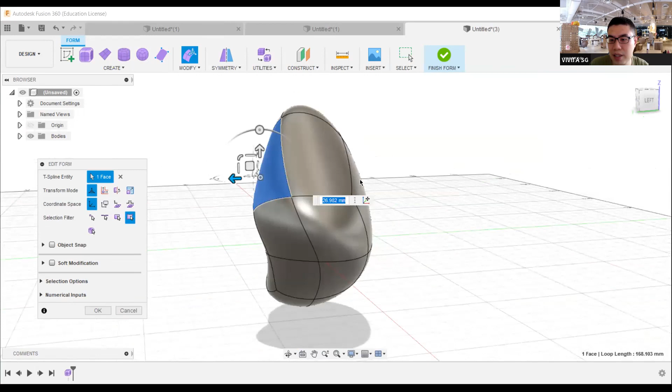Ian and Zuru, have y'all used freeform before? Never. Not really, that's why I'm trying to. I want to see how you do this part. I'm not very good at freeform. Okay, freeform is my favorite. The weakest one. Yeah.

Okay, so basically freeform is manipulating a block of clay. So if I want to make a vase, what I can do is I can actually select. When I select this shape, I can modify it in any way, shape, or form.

If I click on this button called Edit Form, a transform mode appears. When I click on any of the faces, there are many controls here. If I select translate, I'm only translating. If I select rotate, I can rotate the face like that.

If I click on scale, I can scale this literally. So if I'm going to create a vase, I hold shift, select these 4 planes, then hold alternate, I can extend this part out. So I can create an organic looking vase.

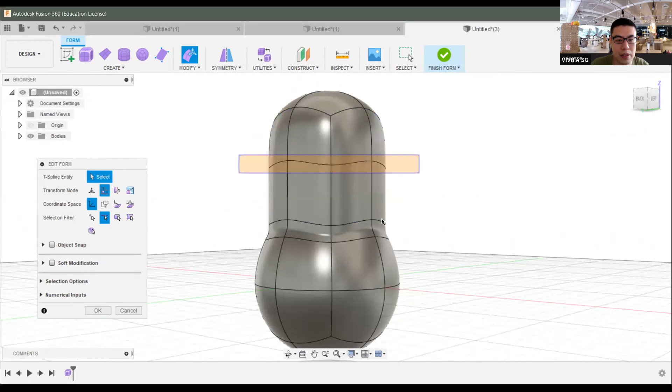The other part is I can select the edges and rotate. Then it becomes curvy, something like that. Then I can also flatten the bottom if I want. Something like that, roughly.

Suppose this is my shape already. Once I'm done with this, I click on finish form, and it becomes a solid body. But when I get to this stage, I can't edit it anymore. So basically that's freeform.

How do you add faces? Add faces is called subdivide. Go to modify, subdivide. I need to select which part you want to subdivide. If I select the whole thing, then click on subdivide, it adds more faces. Then for each individual face, you can do stuff with it. You can go crazy, move up and down. If I want my vase to be weird, I can just do crazy stuff like that.

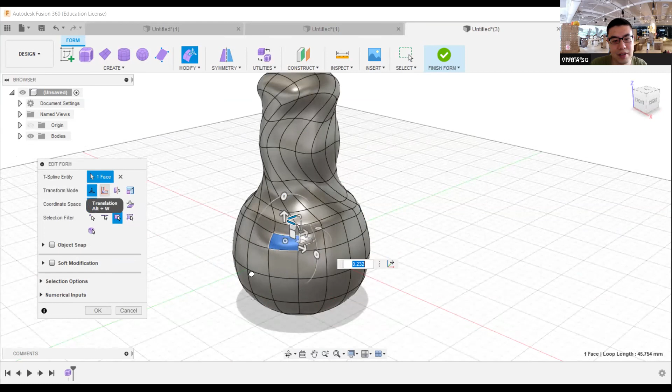How do you change it so I can see the mesh lines? You go to viewport, display settings, visual style, and select shaded with visible edges. If you click shaded, it shows like that. You set shaded with visible edges.

That freeform is basically clay. You like clay, right? That's why I made my puzzles. I use this function to make all the donuts and everything. See the donut? I create a new one, super easy to make. I think you can also create a torus. Yeah, donut now. Donut puzzle.

Then I subdivide the entire thing. But in terms of printing, is it difficult to print freeform stuff? No, all the stuff I'm printing now is all freeform. You see this one? This is freeform, but the base is still quite flat.

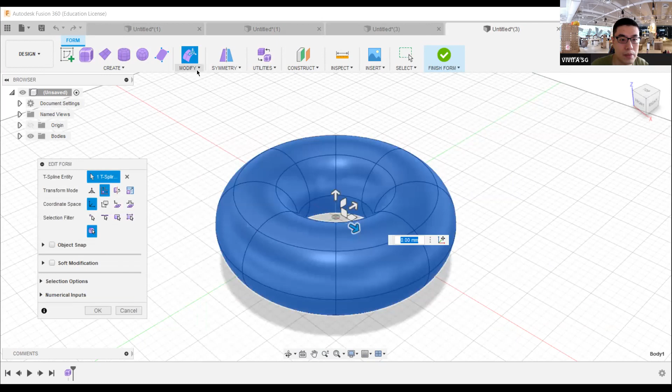Then I show you how I make the thing. I just select this entire thing, then I subdivide. Subdivide the entire thing. Why can't I select thing? Something like that.

Something like that. Then for the cream part, what I do is I extrude this part out. Then it's really just playing with clay. Just a rough example. For example, like that, right? Then I extrude the part out, alternate.

Something like that, roughly. Then it seems like there's some layer over here. Then I just select this part, then I move bit by bit. Not like cream already - just move up and down, make it inconsistent. But I need a lot of patience, I need to move bit by bit.

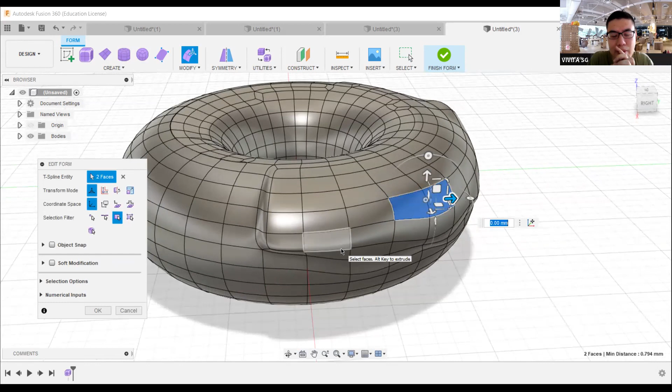Can you join faces? Yeah, so if one part is subdivided too many times, then I want it to become just one face again - I don't think you can undo the subdivision. So it's quite, unless you actually subdivide the specific area. Yeah, then that's how it's made. Then after that, I just import the puzzle shape, then I slice the whole thing through.

That's it. Once I'm done with it, I just click finish form. Oh, some errors. Oh, pretty cool.

Ayana, do you have any questions? Yeah, I'm just showing you a more advanced technique.

Okay, if you want, I can show it to you when we reopen. Okay, freeform is a bit, it takes some time to get used to because it's quite complicated. Yeah, and it's viewing in 3D also. Yeah, it's really in 3D. Yeah, it's really like clay.

Okay, I think you did very well today with the vases. This one is maybe the next few steps, then we can try to make fake food. Actually, I'm thinking of that also, but this freeform one...

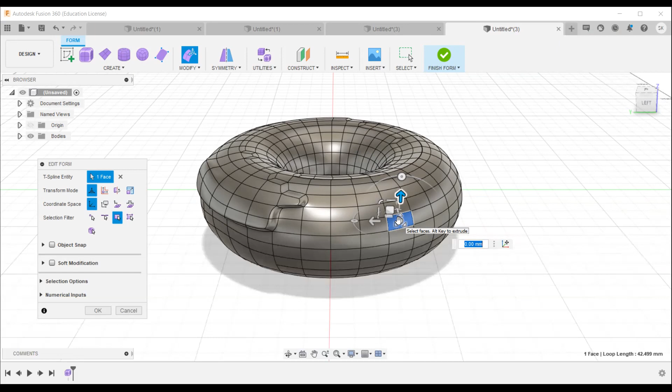Ayana, you wanted to say something? I saw you unmuted yourself. No, not really. Okay, are you okay?

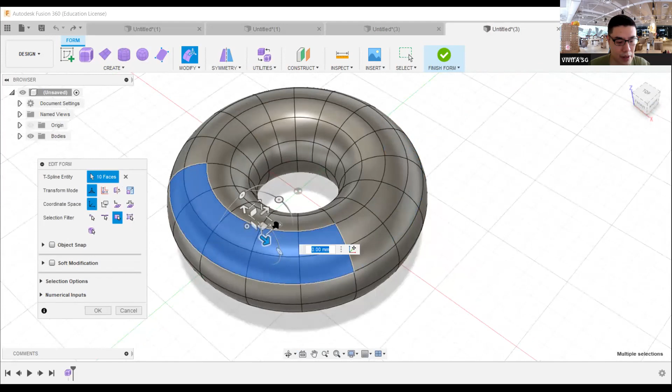So what I did for the cream is I selected the entire face like that, for example, then I extruded it out. I hold alternate, I extrude out, something like that. And then I can move it down, or move it up a bit. Then I select this face, I can move it down like that.

But it will look nice if you actually select all the faces on the top, then move some up, some down, some big, some small, so there's some sense of realism. If not, the donut will look very mechanical. So what I do is select this part here and then alternate out like that.

Oh, what's the alternate do? Alternate is to extrude out the face, make extrusions. So if I hold alternate, I do out like that, right? It creates extrusions. If I don't hold alternate, I'm actually moving the face like that. So if I hold alternate, I'm actually making more subdivisions, more segments. So if I want, I will just extrude another time if I want.

But how come when you extrude, it's a radial extrusion? It's not moving in one direction. Oh, because I selected this plane here to radial extrude. If I go in one direction, it will extrude like that. Okay, yeah, this part takes a bit of getting used to.

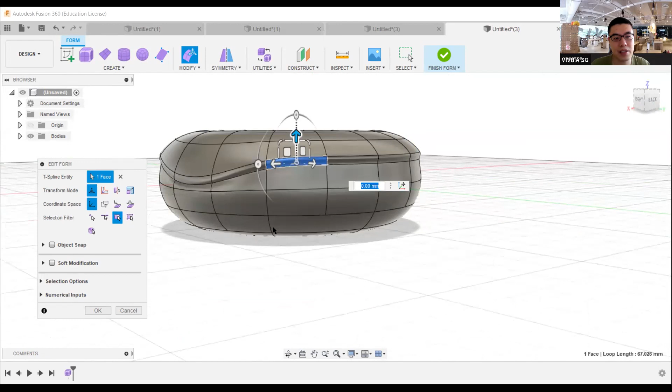Yeah, but cool. Yeah, so that's the beauty of Fusion 360, you can do everything, that's why it's called Fusion. Actually, the thing that can really do a lot of stuff is Blender. Yeah, I heard about Blender.

It's just that if you want to do a workshop, it's not impossible, it's just that the specs for the systems need to be quite high if you're doing this kind of modeling. If you don't have a good graphic card or enough RAM, you can kiss the workshop goodbye already. So Fusion is quite forgiving in that sense. Yeah. Cool. Yeah, that's how it is.

Actually, I use other software. I use Mudbox also like that, but that one is higher level. That's for modeling characters and all, is it? Yeah, that's for modeling characters. Well, you should show us one day. I'll watch. Okay, actually wait, let me go and take it and show you guys. Just finish printing it. Oh, cool.

Modeling characters is next level. Kenneth is very into characters. Yeah, he's into anime and all that exciting stuff. He's bringing his print to show.